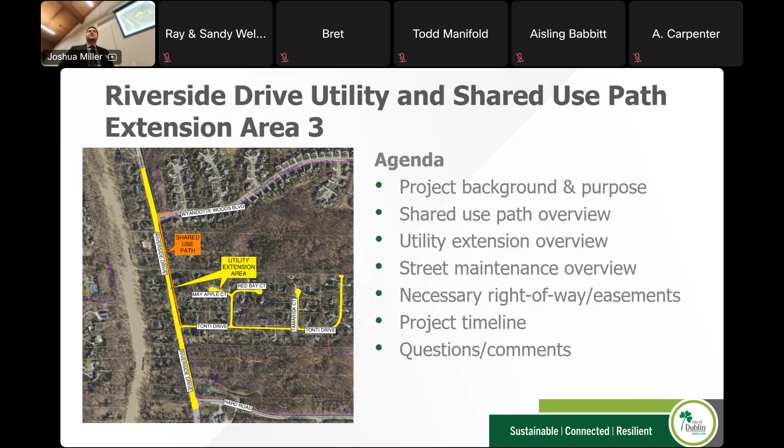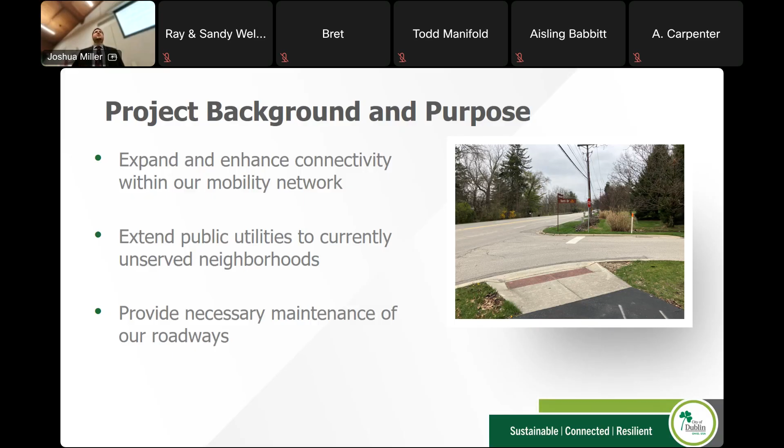So the main purpose for this project is to expand our mobility network, enhance connectivity throughout the city, provide that connection all the way down to Bridge Park, and then really just enhance the network that we've worked so long on, in addition to extending public utilities to our unserved neighborhoods throughout the city. And lastly, we are proposing to do some road work throughout the Tonti Drive, Drexel Hills, and Woodlands neighborhoods as well, as all part of the same project.

So this project essentially combines 4 different pieces. I've touched on them briefly, but we have the Riverside Drive East shared use path that extends from Tonti Drive to Wyandotte Woods Boulevard. We have our waterline extension to areas 3A and 3B. We have our sanitary sewer extension to areas 3A and 3C. And finally, we have our street maintenance of the Woodlands and Drexel Hills subdivisions.

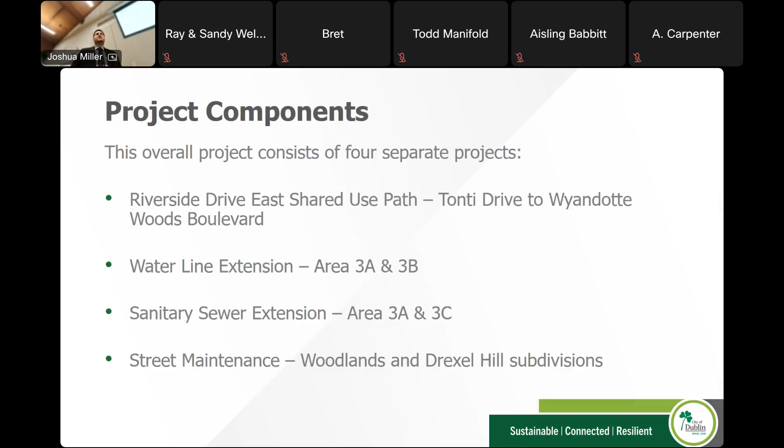For a quick walkthrough of our shared use path, our shared use path will be an 8-foot wide shared use path connecting 2 existing areas between Thaddeus Kosciuszko Park and the existing shared use path at Wyandotte Woods Boulevard. These are 2 existing connections that are currently dead ends that we're hoping to connect back in.

As part of those shared use paths, we are installing new curb ramps at the streets, Tonti Drive and at Wyandotte Woods Boulevard. The path will generally have at least a minimum of 2 foot of clearance from the edge of the path to obstructions such as power poles, trees, whatnot.

And then we wanted to point out that this has been identified by the city as late as 2016 as part of a feasibility study. This has also been a high priority within our city as identified by our Dublin Bikeways Planning Committee. It ranked number 11 using our shared use path project scoring criteria tool. So it's been a path that we've wanted to have connected for a while.

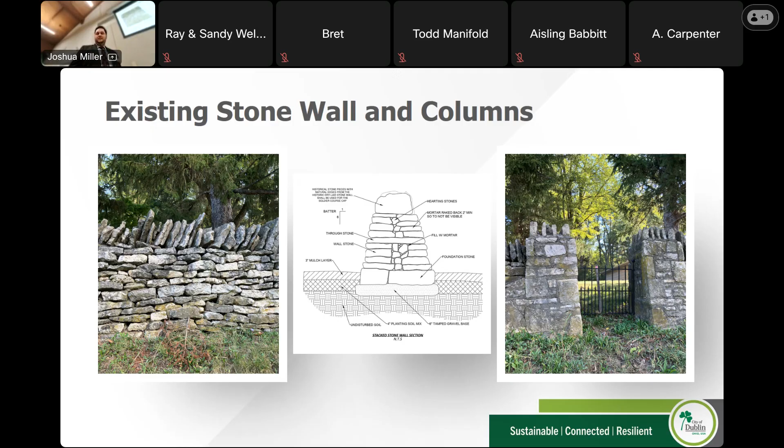But as part of our project to install our shared use path, we have to extend that culvert, and there will be some additional drainage updates along with that, just so that we can essentially regrade the area back to make it continue to function. We will also be installing a fence to separate the edge of the culvert extension from the proposed shared use path, just to help deter people from crossing over.

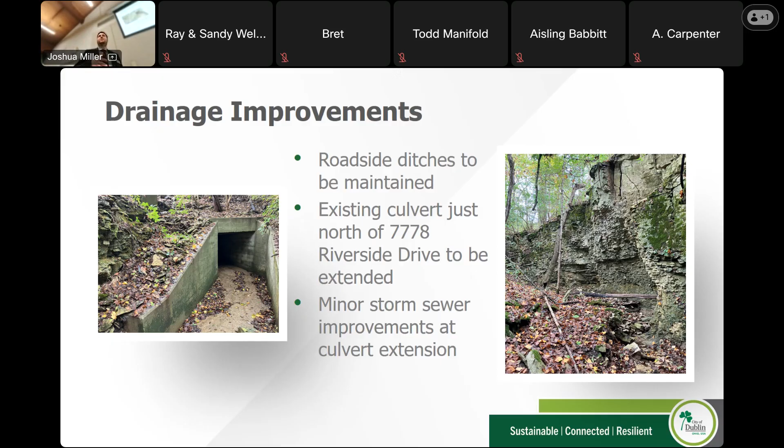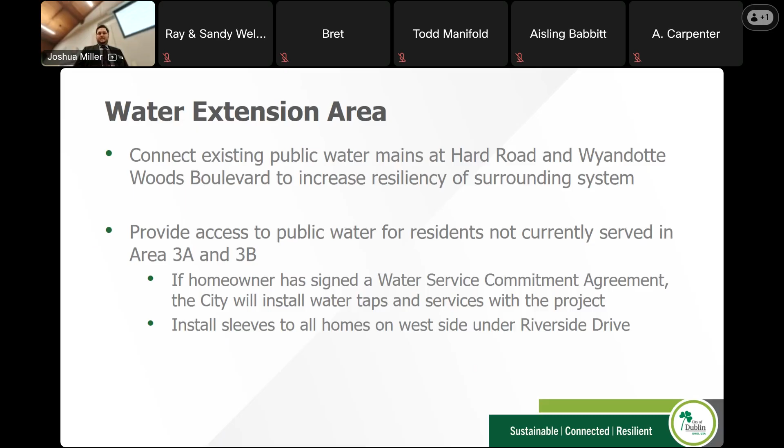Doesn't want to go. I think I missed this. I don't know why it's taking forever.

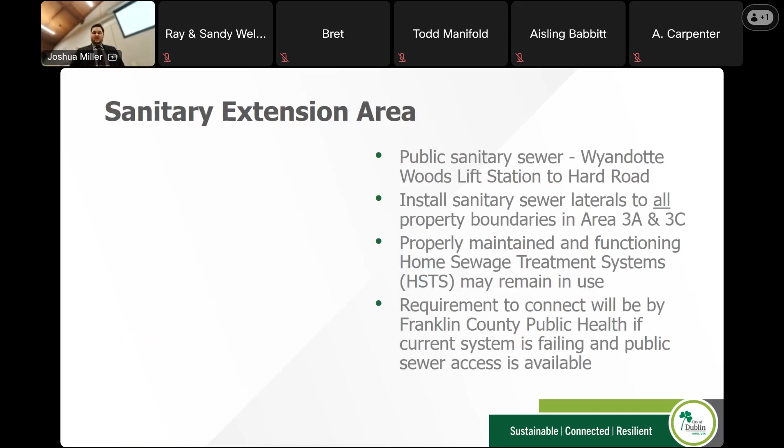There we go. So on to our sanitary extension area. We touched on installing sanitary throughout areas 3A and 3C. As part of that, the city is not going to require residents to abandon their septic systems or their home sewage treatment systems or HSTSs. Throughout the area, we are installing new gravity sewer, which will provide access per Franklin County Public Health, but let me restart.

So we're installing sanitary sewer throughout areas 3A and 3C. That will extend along Riverside Drive from Wyandotte Woods, the Wyandotte Woods lift station, all the way south to Hard Road, providing access all along Riverside. We're also going to propose 2 branches cutting into the Tonti Drive, Red Bay, Mayapple, and Tamarisk Court areas.

Again, homeowners will not be forced by the city of Dublin to abandon their septic once we've completed this install, but we are proposing sanitary laterals to make it easier for a future connection when available. The only requirement would be by Franklin County Public Health: if you currently have a septic system or an HSTS that needs replaced or is failing, then at that point they may instruct you to connect to the sewer.

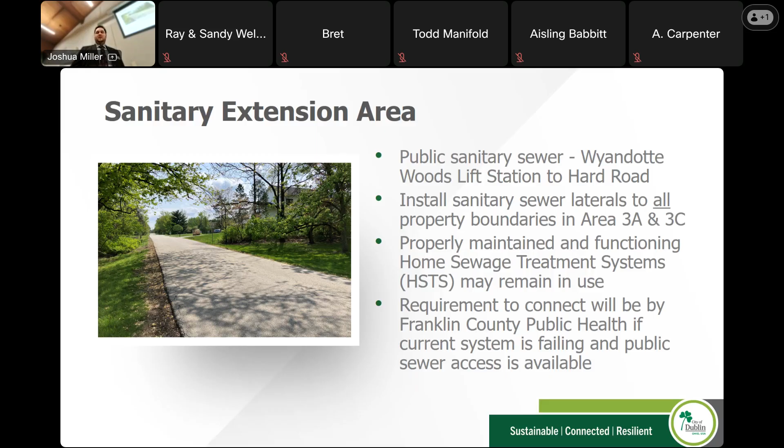As you continue south, both the water main and the sanitary sewer extend along Riverside Drive. There are a couple connections for our sanitary sewer where it enters the Woodlands and Drexel Hill neighborhoods. The public water main connects to the existing water main at Tonti Drive, as well as the existing water main down at Hard Road.

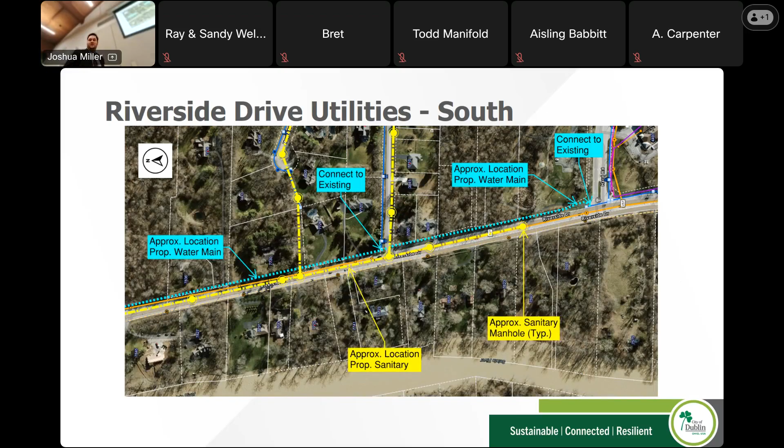And now we have the Tonti Drive, Woodlands, Drexel Hills neighborhoods, where you can see the sanitary extending through. So we do propose 2 separate branches for sanitary sewer to serve this neighborhood. The ultimate reason being the topography is very finicky when it gets to Mayapple Court. Mayapple Court is actually 10 to 12 feet lower than Tonti Drive at the location where Tonti Drive intersects Red Bay. And then it's similar with Tamarisk Court, where Tamarisk Court is about 8 foot lower.

But ultimately, for us to serve Mayapple Court off of the Tonti Drive trunk sewer, we would have had to lower it 12 to 15 foot, which just makes the project cost prohibitive. So we've proposed a second trunk to cut through a couple backyards to get to Mayapple, where it also serves Red Bay.

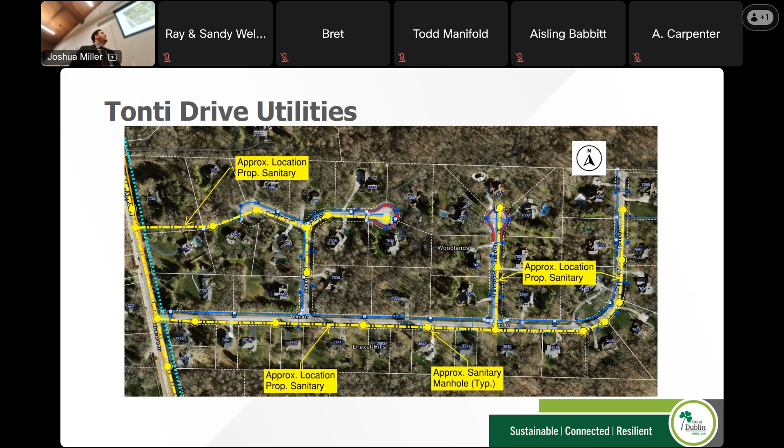One other thing to point out is that in conjunction with our sanitary sewer, we will be performing street maintenance work throughout the entire Woodlands and Drexel Hill neighborhoods. This will include curb and gutter repair, pavement spot repairs, and then pavement resurfacing at least 1.5 inches, sometimes more depending on what our studies find.

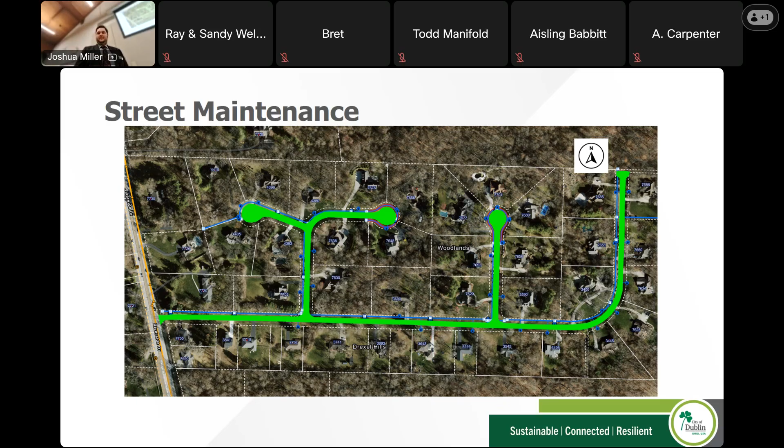So once the project is completed, we've included some information for how you can potentially connect in the future to either sanitary or water. So the first step is always getting a City of Dublin right-of-way permit. That permit will have to be submitted to our city staff for review and approval, along with a minor fee. You have to apply and pay for City of Columbus permits, capacity fees, charges.

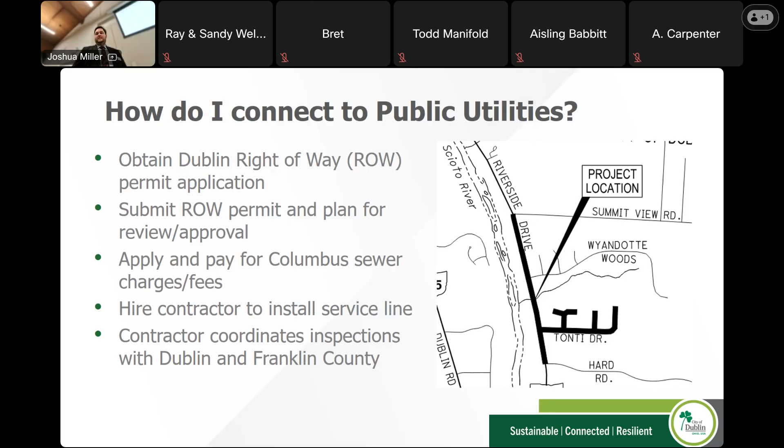Then you would at that point hire a contractor to work on the install for your actual service lines. And all throughout this, for a sanitary service lateral install, you will have to coordinate with Franklin County Public Health, as well as the City of Dublin. As part of the city's utility extension policy, we waive 100% of our capacity fees for all utility extension areas, which includes areas 3A, 3B, and 3C.

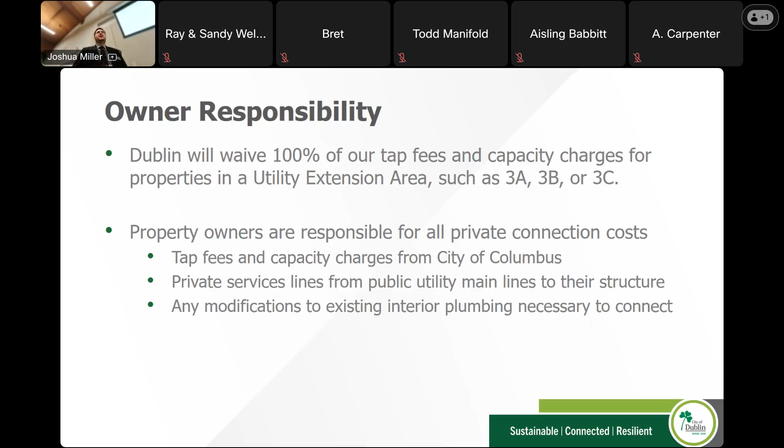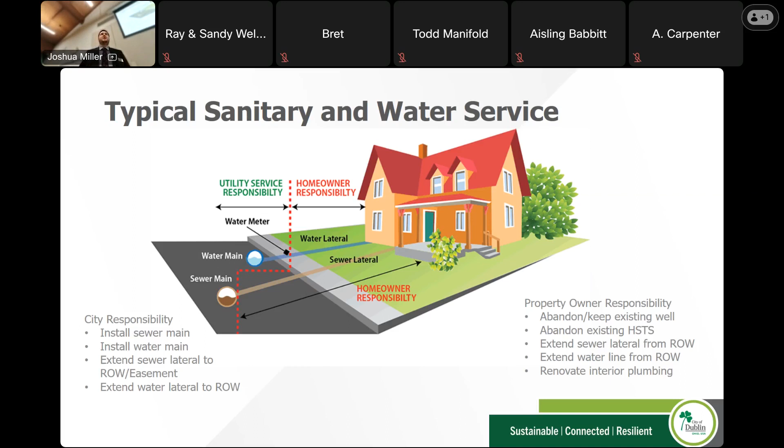But as part of our general policy, the city is responsible for installing water mains, sewer mains, and then extending laterals to the right-of-way or easement edges. And then it is on the homeowner to work to abandon their septic, abandon their well, and finally extend those laterals all the way to the rest of your house and perform whatever conversions at your house are necessary.

To touch on it again, the City of Dublin does not require connection when we install our sanitary sewer main. But Franklin County Public Health, if you have a failing septic or a failing HSTS, or if you go to replace your HSTS, the county may at that point require you to connect in to our lateral rather than actually replacing it.

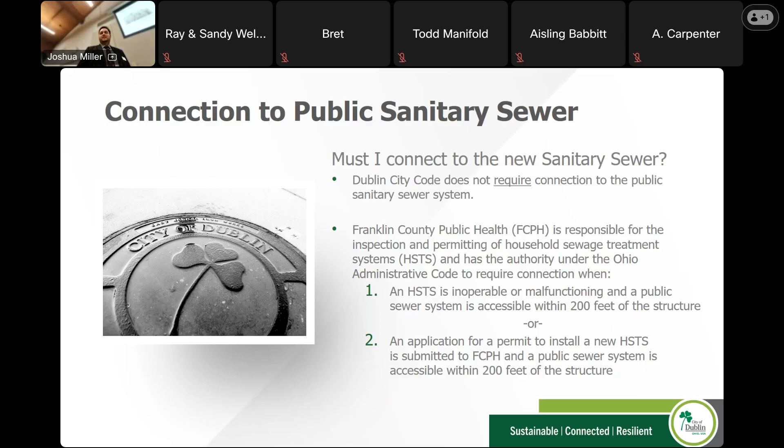So some of the advantages that go along with connecting to public utilities include improving safety and health, increasing the overall quality of the water to your house. There's less long-term maintenance associated with a connection to a public system, and then there is a possibility for it to increase your home value.

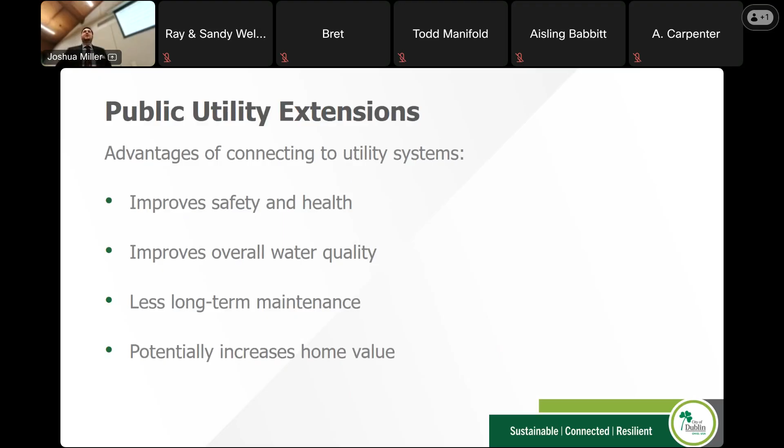Finally, we'll take a quick look at the necessary easement acquisitions and right-of-way acquisitions. So on the screen, I have shown in red the proposed right-of-way that is being acquired for this project. This is generally for the proposed shared use path and proposed water main. In green, you have utility easements to the left of your screen, which is, I believe, the north. No, that is the south edge. You have utility easements.

There's water along Riverside Drive, and then you can see the extension that cuts up to Mayapple Court for the sanitary. And lastly, we have in yellow the PRO, which is public road present road occupied, which is essentially existing right of way, but is currently titled to the homeowner. So the city will be cleaning that up. It's land that is currently used for right of way, but we would just be cleaning up the title. We also have James Howard from MS Consultants here, if any of you would like to talk about the acquisition process.

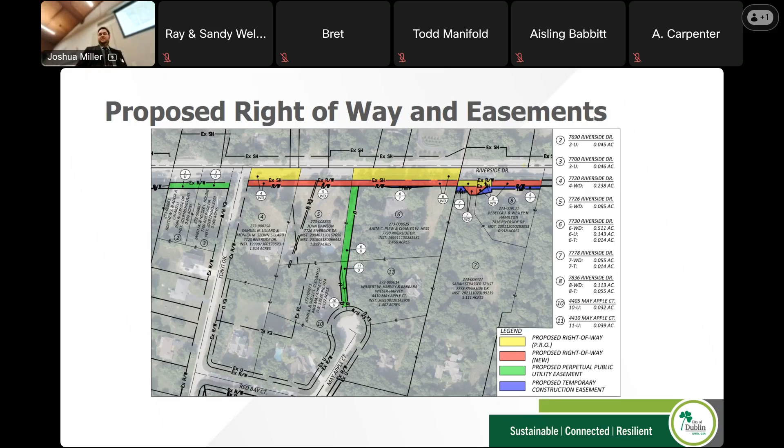Lastly, we have a quick look at our proposed schedule. So we are currently finishing detailed design in 2026 and have started the acquisitions process. It's ongoing. We are expecting to have our final permitting in line in 2027 with the intent to go to construction, depending on when we can acquire funds, in either 2027 or 2028. It would be the hope that we would be able to construct all four of these projects at the same time so that we can have essentially one disturbance to the neighborhood rather than having to come back multiple times. But we are just working to get funding together for that all to work out.

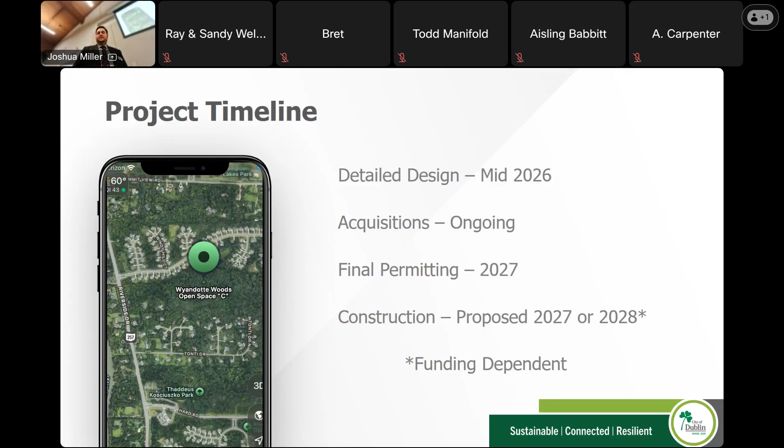And at this time, I will put up our contact information and I'd be happy to answer any questions that you have. For people who are attending virtually, please put your questions into the chat and we can have Ash coordinate them with us. Any questions that are asked, I will try to reiterate for people online just so that everyone can hear the question. What did that say? Yes.

What is an HSTS? So an HSTS is an acronym for home sewage treatment system. It's essentially a septic or a mound system. If you're not connected to the public sanitary sewer, you send your wastewater through a system that essentially cleans it to some degree, but then has to be pumped out to remove the solids.

You have a list of approved contractors to put in the pipe? Yes, we do have a list of approved contractors. If you would like to give me your contact information, I can send that to you. Our list is essentially any contractor that's licensed by the city of Dublin. Do you have an idea what it costs? Per foot is going to be a very tricky question just because of the bedrock throughout the area. Properties on the western side of Riverside Drive may see higher prices per foot than residents on the east side, and it will be different than residents along Tonti Drive and Woodlands and Drexel Hills.

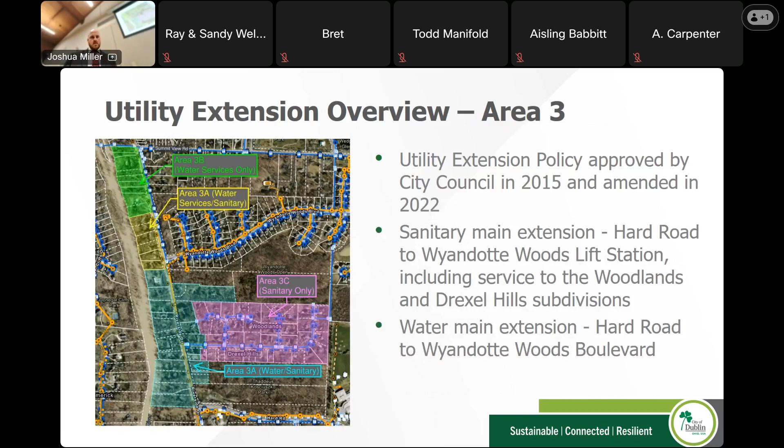It's in here. The question is, will it serve those properties on the west side? So which of those is? Yes, so the question being if it'll serve the properties on the west side of Riverside Drive. Pretty much 6 parcels north of Wyandotte Woods will have access, and then it stops. Yeah, so I think this property will still have access. I'm not quite sure the address there. It's very fuzzy. I use the pointers so that people online can see where we're pointing. That's fair. So that's probably the last property that'll have access.

Well, the other conflict with getting sanitary access to those properties immediately to the north of this, or the extension of the lift station, there's a large drainage culvert just past it, where that drainage culvert is essentially a wall that we cannot easily get around for those properties to the north. So that's part of the reason that we show sanitary services ending where they do, because we've got, I want to say, a 6 or 7 foot diameter culvert.

Yes, Ash. Water and sewer lines must be how many inches below ground in the residence yard? So, yeah, the question being how deep water and sewer lines need to be in residents' yards. Generally speaking, those lines need to be below the frost line. So typically 4 foot plus deep.

That applies for both of those, but depending on where your sanitary exits your home, that could change things, just to make sure that you have a gravity connection if possible. Otherwise, you're going to an ejector pump or something like that. Generally, we try to keep 10 feet with that for sanitary. Yeah, and generally, yes. So the general depth would typically be around 10 foot plus for sanitary. That allows service to basements, but it obviously depends on your home and what depth you can physically get to the sanitary trunk.

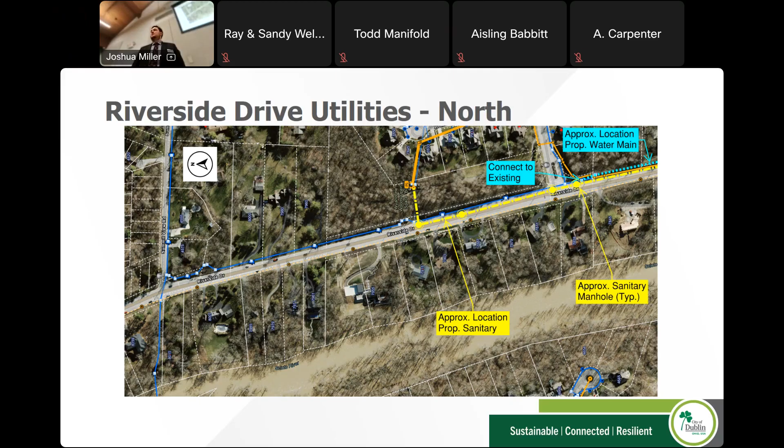Yes. I was thinking that you have to go uphill within our neighborhood, and then you would use our shared use path. So that sidewalk would also need to be lengthened to that. And then it would dead end there, correct? At the end of our path, that's where it dead ends. Yeah, the shared use path currently dead ends at the northern edge of Wyandotte Woods, and that is a public shared use path. And so it'll receive some additional foot traffic, maintenance and some other things.

That path eventually will extend further to the north, through the Riverside Drive and Summit View intersection improvements. That project is looking at a 2029 construction, I believe, right now. It just depends on the overall process, and that'll extend the shared use path with that project from the Wyandotte Woods edge up to Arrowhead Drive. On the east side? Yes, on the east side.

Good question. Yeah, generally speaking, in terms of restoration, whatever we as a project damage with the job, hopefully we've taken all that into account. We intend to do our best to restore, reseed, do all that sort of stuff.

So will you meet with our HOA then and kind of discuss some things? Because even on that shared use path, it could use, we've talked with Amy about this too, some additional trees and things of that sort, that's just nice stuff. Yeah, and it's been generally unconnected for a long time to the rest of the path network, so I think that's part of it.

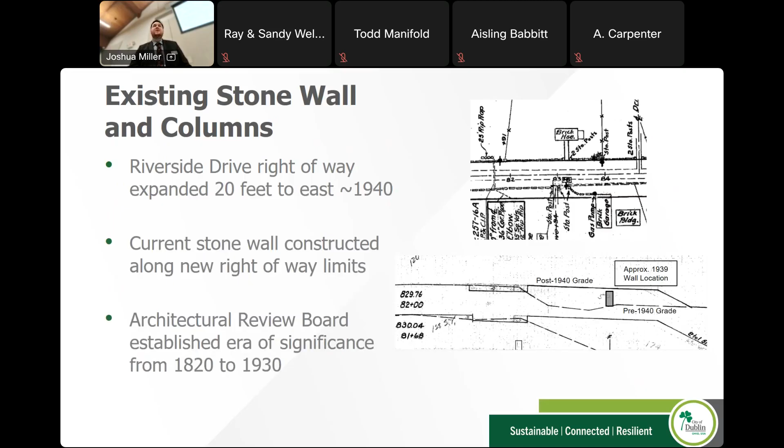Any other general project questions? Yeah. So the walking path is about 8 feet wide. Yes. What's the closest distance that it would be from the street to the edge of the walking path? So generally speaking, both for pedestrian safety and for comfortability, we are proposing the edge of this shared use path to be, I want to say, between 10 and 12 foot at the minimum. So you're typically at least 10 foot off of the edge of Riverside Drive, just to try to give you some sense of comfortability as you walk through there.

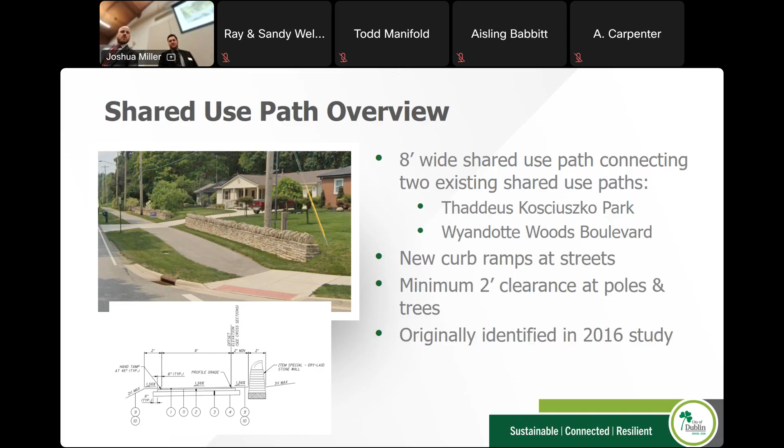Obviously, it's a high-speed road. There's a lot of truck traffic. Some of the path too, especially when it comes to the city property, we're going to use topography. It'll be kind of elevated a bit higher than the roadway itself. That really comes in as we go into this area. So once you get about 2 homes north of Tonti, the path is actually going to be kind of up about 5-ish feet from the roadway.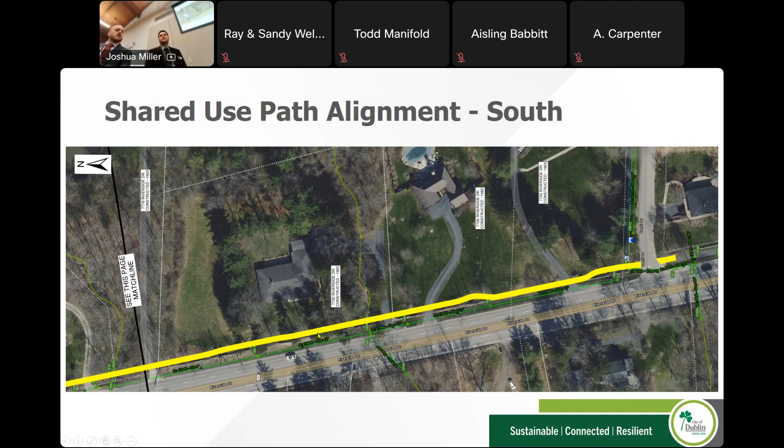So it'll have that 10-foot separation. Then grade wise, it's also going to be separated a bit as well. And then it'll be able to utilize the park space a bit more to give a little more space. So we did our best to be cognizant of where the residents' homes were and not get it too close to their property, but also make sure we had a safe area that gives enough shy distance for everybody. It's a good question.

So it is 7:30. So unless there's any other general pressing questions, which these have been great, I love your questions so far. And assuming there's no new ones online, Ash, I'm going to go ahead and close our overall meeting. Myself and Josh and Paul and Michael and Ash are all here to discuss or answer any questions you may have. We do have a couple sets of plans if you want to talk specifically about the engineering and go through that work, or anything specific to your property itself, we can also address that.